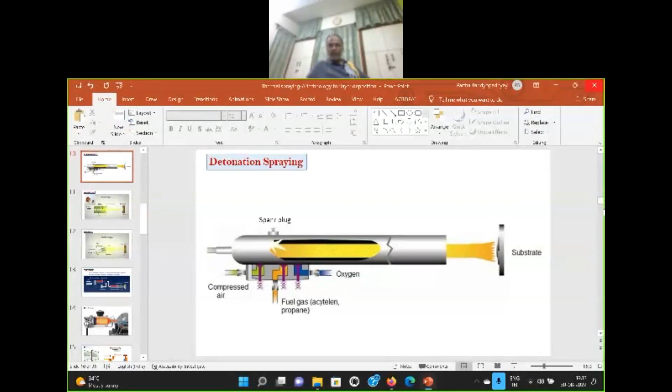Thermal spraying, a technology of adding layers. This is something we do. Now I will change the screen. Sometimes there is a time delay. Please let me know if you see my next screen.

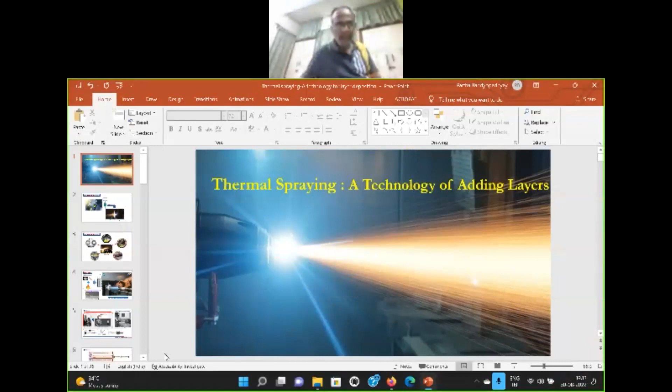Imagine a simple situation. You start with a 60 millimeter diameter shaft, and somebody asks you to reduce the diameter to 59. What will you do? Simply remove one millimeter, simple thing. Now suppose somebody asks you to increase the diameter. What will you do? Okay, therein thermal spraying comes in.

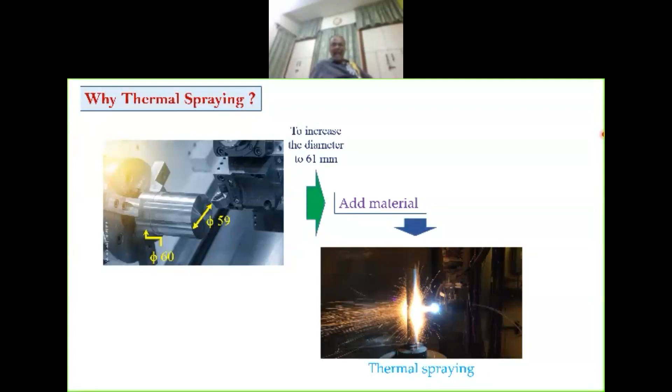It's an additive technology, though it does not belong to the club of so-called additive manufacturing, but it's definitely a technology of material and dimension addition.

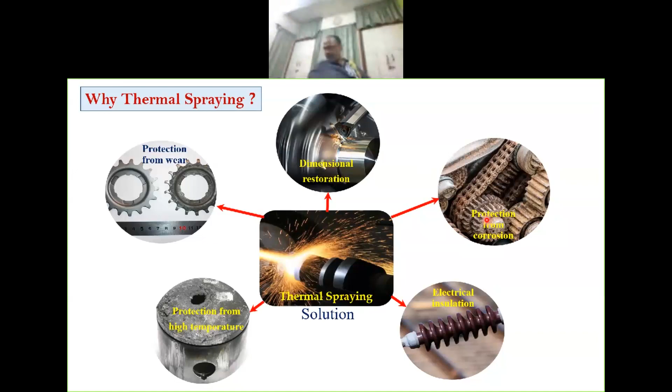Other than dimensional restoration, what can you do? We can add a wear protective layer. We can have a thermal barrier coating. We can have protection for electrical insulation. We can have protection for corrosion, and so on and so forth. I will talk about them.

What do we do in thermal spray? We start with a precursor material, either a powder or a rod, and we have a heat source. We marry them, where this precursor material is consigned to flames. They melt, and then somehow they are projected to a substrate or a target. If you melt a small particle and project it, what will happen? You will get a deformed particle. This is known as a splat.

This is known as a splat, the unit of thermal spray coatings. Then one layer will be occupied with splats, then the next layer, bead by bead, the coating will build up. To what extent? That depends. It's not a so-called thin film coating, I cannot go to half a micron.

Minimum thickness will be around 25 microns. How thick can we go? Up to several millimeters. The industrial standard is something to the tune of 300 microns.

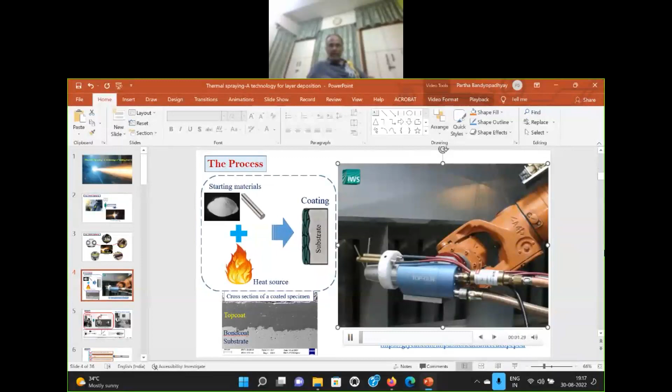Wait a minute, please. This video doesn't have sound.

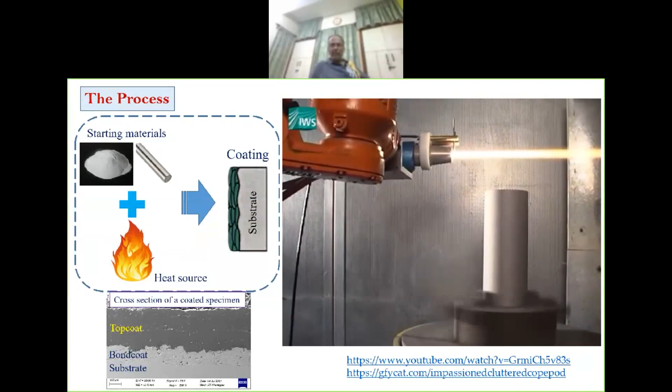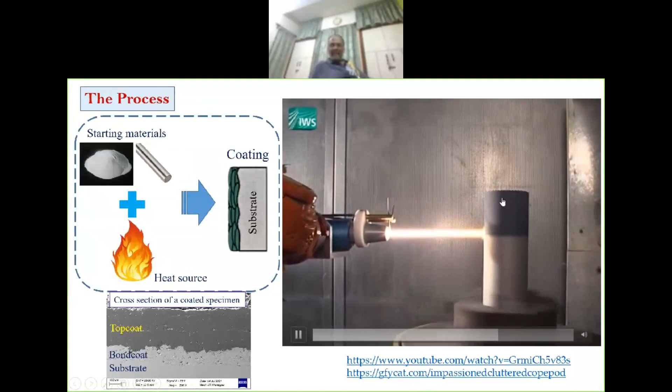This is the flame that comes out. It pushes the powder inside and you get a layer. This coloration is due to a different layer that is built up on the cylindrical substrate. This is how it is done.

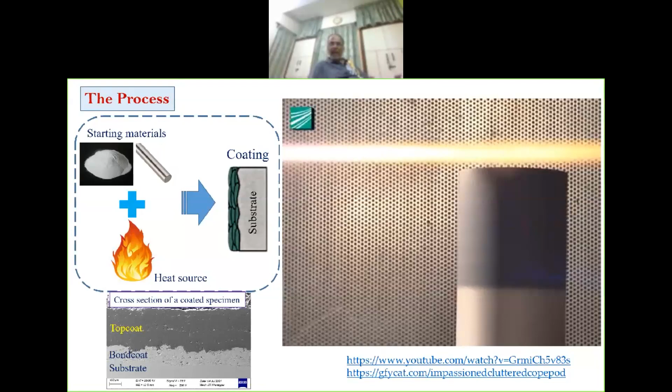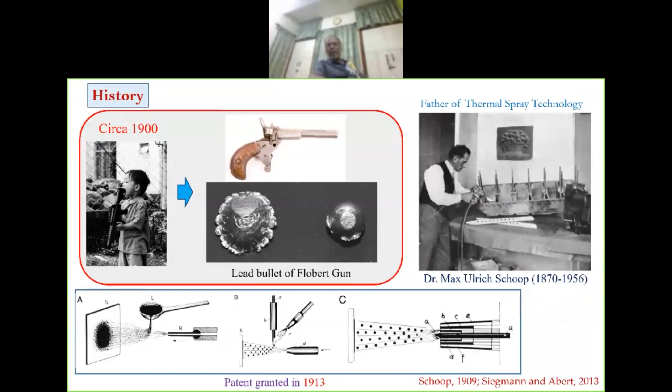He did his work in Zurich, in France, in Moscow, in Ukraine, many places, mostly in Europe. He was close to Tolstoy. And late in his life, he went to America to meet none other than the other great inventor, Thomas Alva Edison, but their collaboration, well, it's not well known.

One day, he found his son playing with a gun that pushes lead pellets. These lead pellets, when they impact on a metallic substrate, stick. This idea struck, and the idea of thermal spraying was born, which he took up and gradually developed in various forms.

Initially, he had a heat source, a flame. Onto it, he put powder. Next, he took up a rod, melted it with a heat source, and used compressed air to blow the molten particles to the target. There's another form where he used a gun, packing everything together.

A patent was granted in 1913 after a lot of fight. He had to invest a lot of time convincing the jury that thermal spraying, in fact, is a unique process. It is not a copy of a predecessor or another process, and it's well different from painting. Finally, a patent was granted.

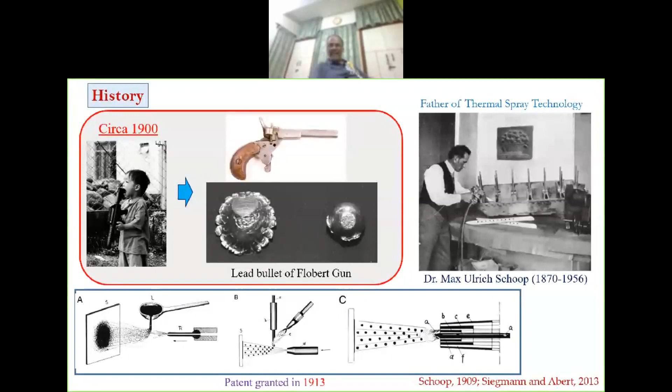Thereafter, it took off. We had the first stationary metal spraying plant. Then from powder we moved to solid wire. The process called metallizing was born, using oxyacetylene flame. In 1939, a job shop was opened. Now customers can come, get their old products refurbished with a coating, and go. Arc spraying came around the same time.

In 1950, people started talking about plasma spraying, detonation spraying, low pressure plasma spraying involving a vacuum chamber. And HVOF came in the year 1980. Thereafter, we have new kids in town like cold spraying and HVAF.

Now, what are all these? There are different variations of thermal spraying. It's a domain. Under this subject, we have got various processes. They're similar, but not exactly the same. Let us have a quick look.

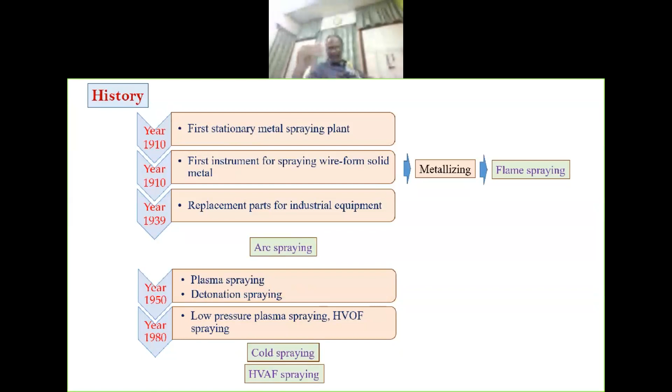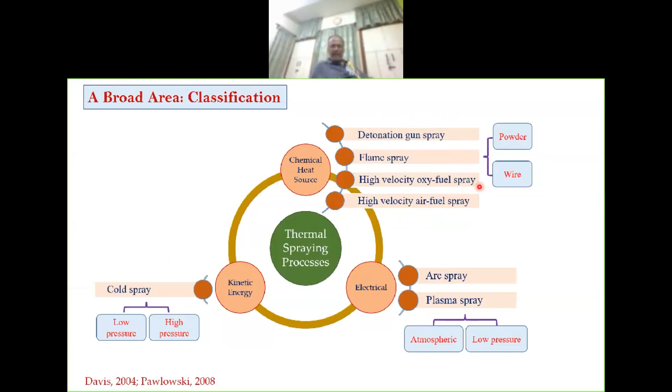When we have a chemical heat source, meaning either oil, mineral oil, or a gas like hydrogen or acetylene, we get these processes, either using powder or wire where consumables are used.

When you have got an electrical arc, we use these processes, arc and plasma spray. But suppose we do not want any heating at all, we do not want any melting. Is it possible? Like the lead pellet? Yes, that is also possible in a modern process known as cold spraying.

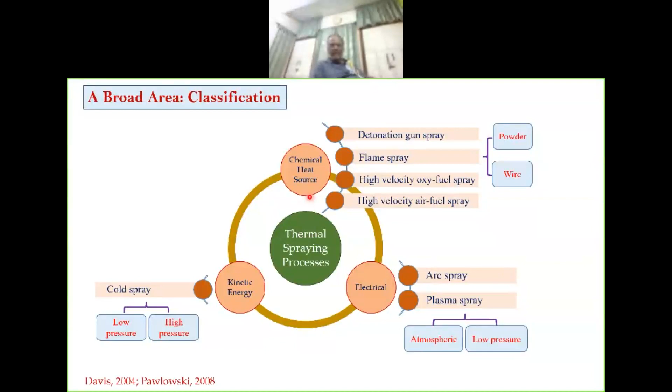Let us see what these processes are, very briefly. One second, please, it's creating some problem. Yeah.

We pass on the fuel gas, set the mixture ablaze, advance the wire tip that melts, advancing it bit by bit, and the compressed air catapults the molten particles to the target. Target is at a safe distance away. How much? Depending on the process and how much heat we inject, it can be 100 to 300 millimeters. One can use accessory cooling for the substrate as well, so it generally remains cold and does not undergo any distortion. So these processes are also known as cold process.

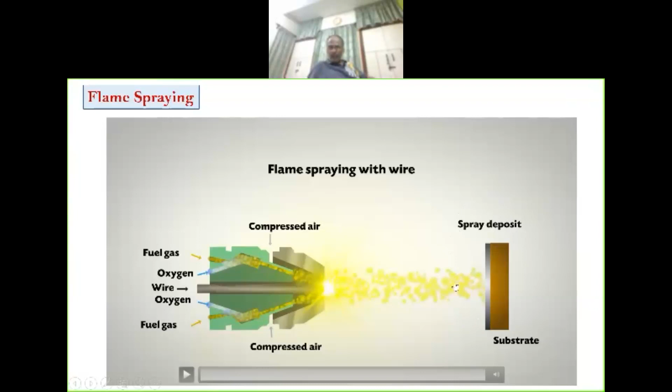It's good for metals. It's good for carbides, where we have a thin layer of metal covering the carbide particles. It's possible that way, it's well known, it's a commercial success story.

One question, Bidut. Yes sir, am I clearly audible? Yes you are. Okay, I need to be assured of it. Should there be any problem, don't hesitate to stop me. Yes, sure.

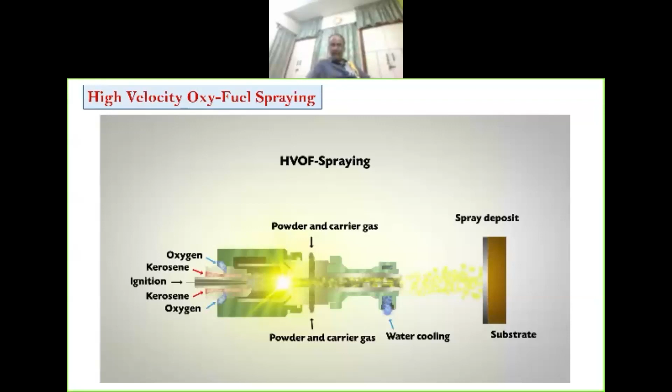Next, another one, we call it detonation spray. What is that? We have a tube. Inside the tube we have installed a spark plug. We push in fuel gas and oxygen and start exploding it at a rate of 2 to 4 hertz. It explodes, high temperature and pressure generates, powder particles inside are carried and taken afloat by the expanding gas and carried to the substrate. Once again, a very dense coating, but it's a metal coating, not meant for oxide. Also, the process is noisy and a little bit hazardous, and it's not available commercially. One must go to a designated job shop to get it done, but it's a very good process for metals.

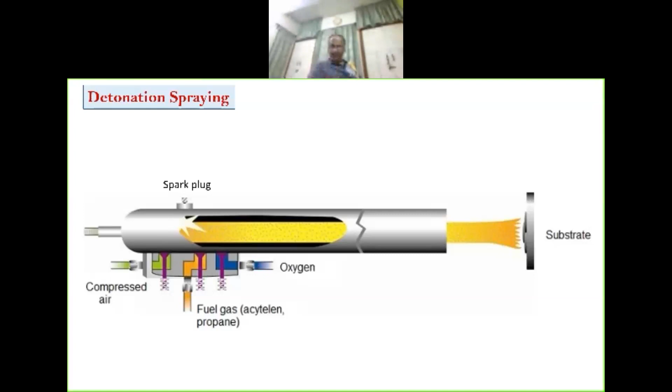Next, my favorite, this is what we do. What we do is something like this. Once again, an encasement is there. It's an electric process, so we have an arc. We have a hollow anode. A hollow anode, this anode is hollow. Into that we put in a bullet-shaped cathode. We put it inside. There's an annular gap through which we pass in some gas. We have to chill the entire gun, so there's an arrangement for cooling water, very important. We have an arrangement for putting powder and carrier gas.

What we do? We start an arc. Gas in contact with the arc will ionize. When it is ionized, it conducts more electricity, so current increases. More ions and electrons, more current, more heat, more gas, more current, more heat. In a small volume of gas, I keep injecting a large amount of energy. Commercially available plasma is available at 50 to 100 kilowatts, it can be more. One constraint is heating: if the temperature is too high, the entire encasement, electrode and nozzle will melt away. So the procedure is good for making a sun if you can contain it.

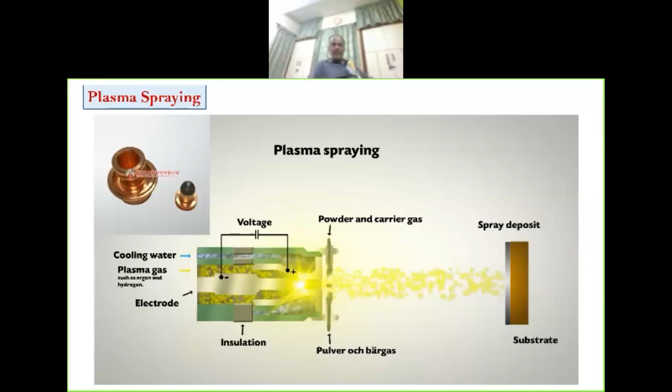Here it's an electrically powered source. We can tune the power, so depending on the power, we can melt polymer, ceramic, or metal. Substrate, as said, is cold, so it can be metal, ceramic, or polymer. So we have metal, polymer, ceramic on metal, polymer, ceramic. Virtually anything on anything, that is the beauty of the process. Speed is reasonably high, and we can get very high temperatures.

Its younger cousin is this, simple to understand: arc spray, developed long back. I have a positive wire, I have a negative wire. Bring them close together, get an arc. The tip will melt away, compressed air jet will do the rest. Meanwhile, keep using rollers, keep advancing the wire. Very good for electrically conductive wires. For everything electrically conductive that is available in a wire, you can develop coating very quickly.

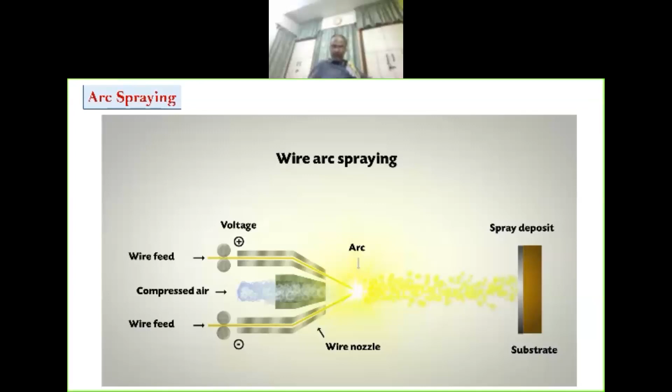One of the new kids in town. What do we do here? We feed helium, argon, or nitrogen gas at a very high pressure. How much? 50 bars, 60 bars, 40 bars, normally not below 40 bars. Put it, heat it to a gentle temperature. For example, if you are spraying aluminium, melting point is 660, don't heat it beyond 300.

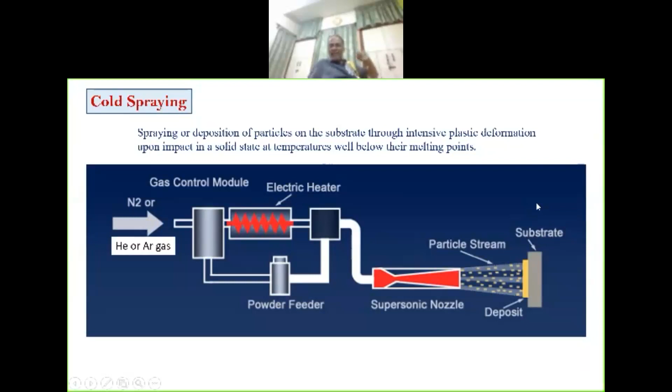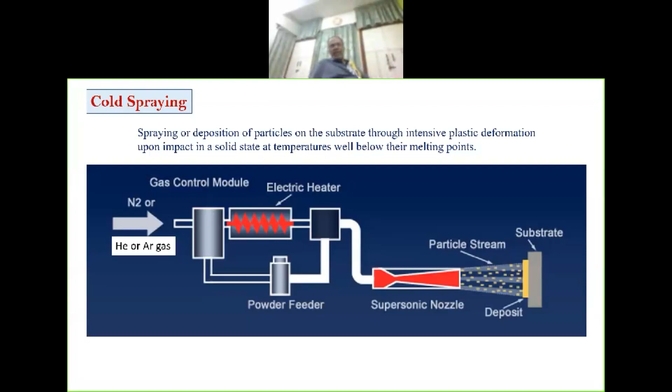You have a powder feeder, pass it to a converging-diverging nozzle at very high speed so that the particle deforms and sticks to it. No melting, no oxidation, no phase transformation, layer is compressive. Of course, it's not meant for brittle materials. I have a video, it's similar.

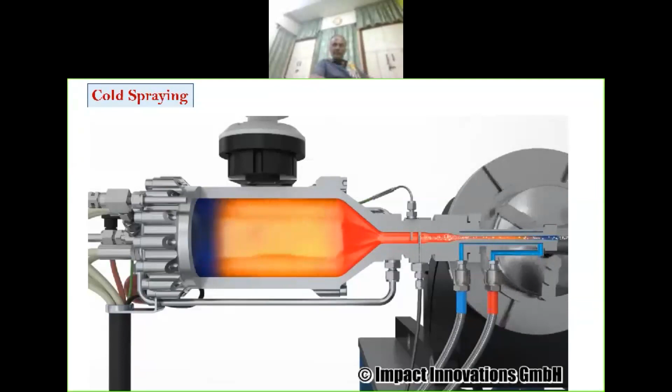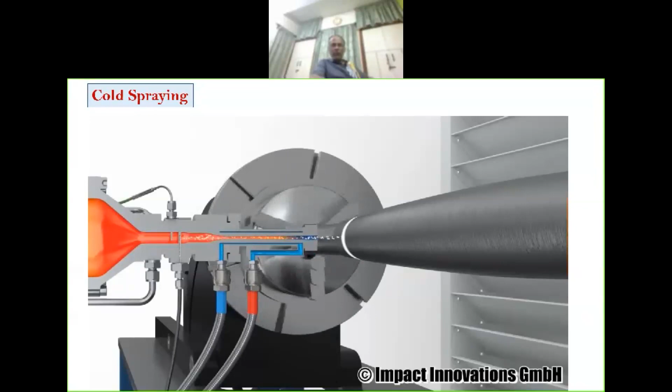Very good. They're deforming and sticking. Of course it's artist imagination, but it is something similar.

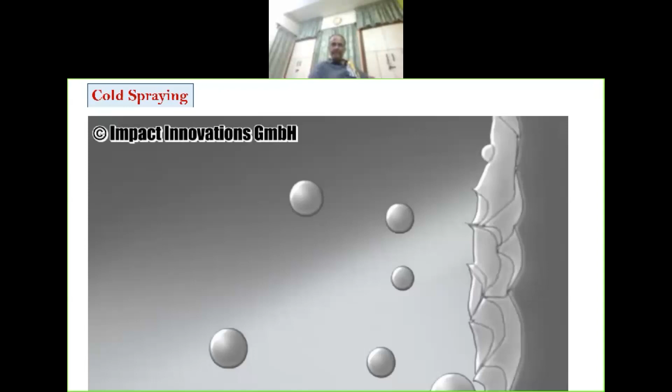I have said many things. Gas at very high pressure, distance 100 to 300, temperature, cooling. These are so-called parameters of spraying.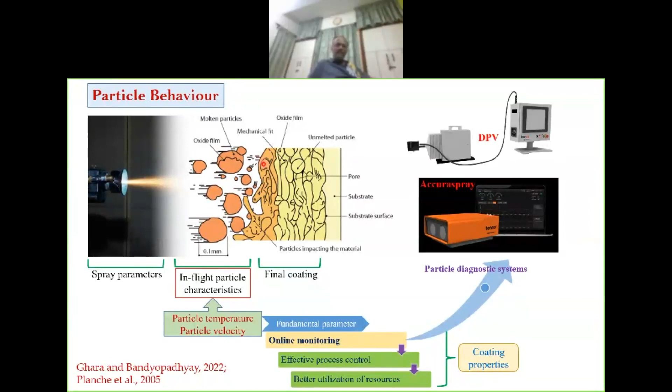Whatever the parameters may be, it is the state of powder before impact that determines successful coating. What is meant by state of powders? There are only 2 derived quantities derived out of 30 parameters. It's temperature and velocity.

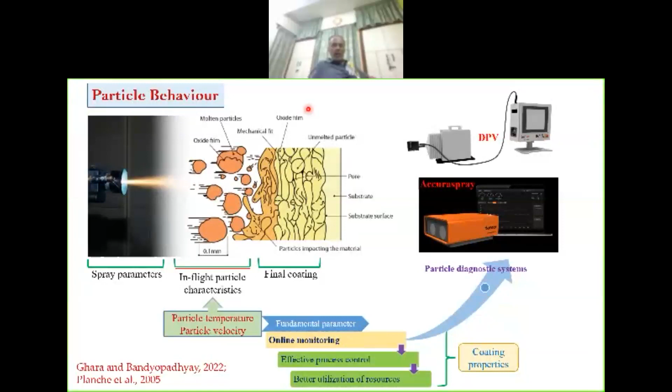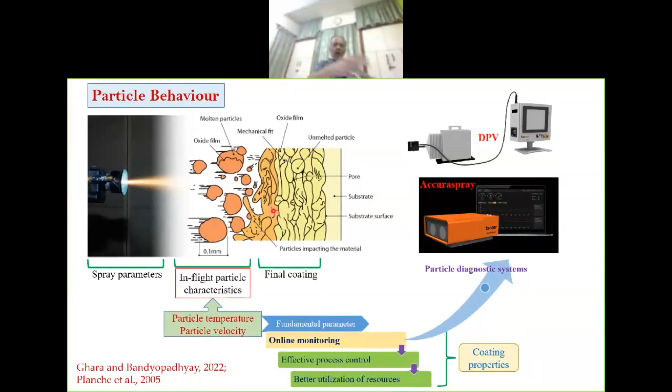Temperature too low, we'll get an unmelted particle, or we get pores, or we get particle bounce back. If you have very high velocity, splats will badly deform. So these two are important.

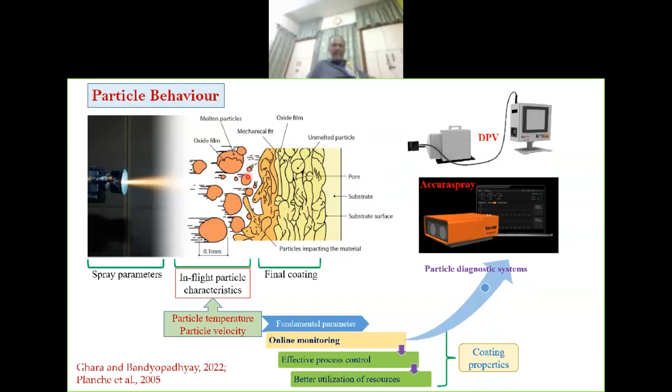So once we can measure the particle velocity and temperature before impact, we really do not care what parameters brought this, it has given us these two derived quantities. So is it possible to tune the parameters and reproducibly produce temperature and velocity in a close range? That's the question.

There lies the solution to our problems. It is possible. It took nearly 100, more than 100 years to achieve this target in a laboratory scale somewhere in India. Still, it has been done in laboratory. We do not know when it will find the light of day in an industrial setup.

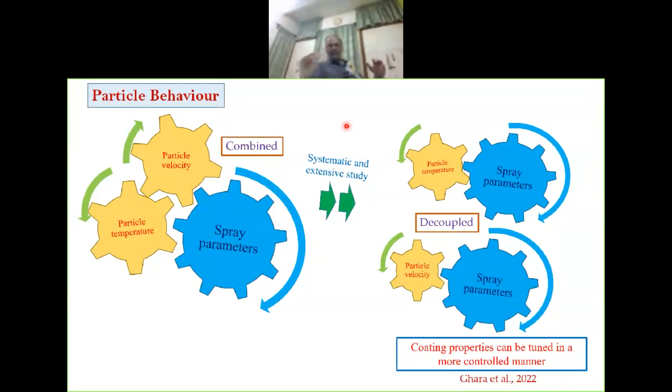What is the problem? The problem is that it is difficult to separate particle temperature from velocity. Why? Imagine you want higher particle temperature or higher particle velocity. What will you do? You'll simply increase the arc power.

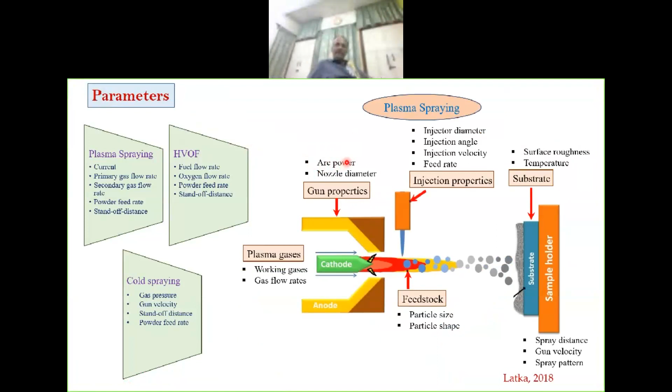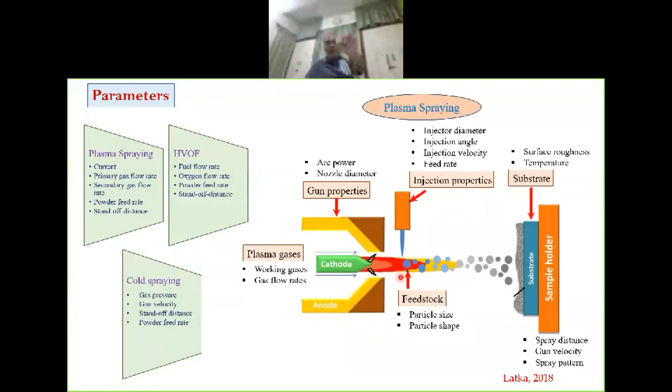Temperature will increase, of course, but at the same time, at high temperature, gas will expand faster and carry the particles faster. Velocity will also increase simultaneously. That is something you never wanted to start with. They are coupled.

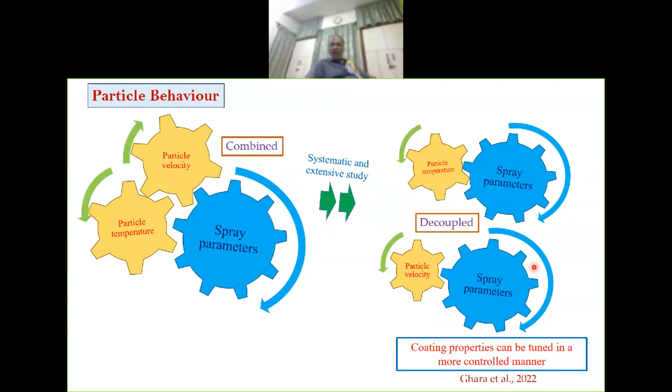Is it possible to decouple them? As said, in the laboratory scale, yes. And well, it was done in 2022 for the first time to our knowledge. What we achieved here is like this.

Have a look at the velocity and temperature. If you increase temperature, you'll melt it. Too low a temperature will leave particle unmelted.

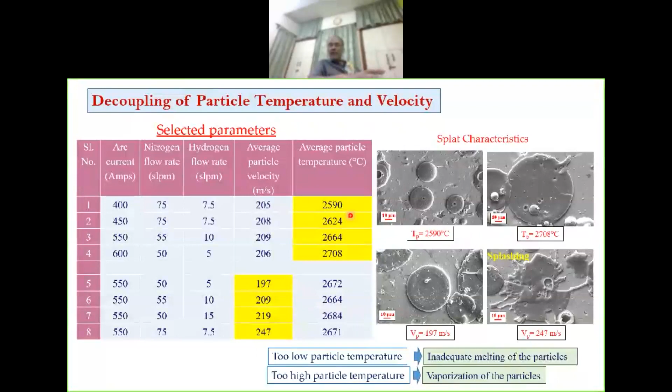But if you go too high, well, you are wasting heat, number one. And number two, for low melting point particles, some particles can vaporize. We can give particle temperature up to 3000. We don't need a temperature of 3000 for melting iron or nickel, forget about copper or aluminium. So deposition efficiency will fall if you insist on too high a temperature.

Velocity, alumina particle 197 meter per second. See the shape of the splat? And you carry it to 247, see the splat, it is deformed. A high velocity will exacerbate the properties of the coating as it has been found.

What happens when you spray with an increase in particle temperature? In the range of this experimentation, it was found that while the velocity is in a narrow constant range, with improvement in particle temperature we got improvement in properties like fracture toughness, elastic modulus, and hardness.

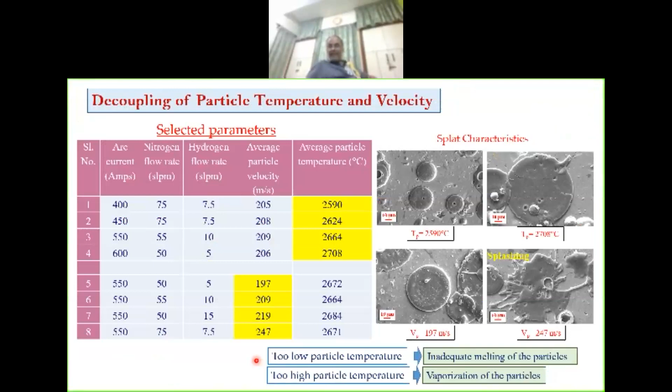Similarly, with increase in velocity, initially porosity decreased because of good particle shape. But when you increase velocity too much, as shown previously, we get a distortion in the splat shape and we get an increase in porosity. Hardness also initially increases, but with porosity it decreases. Same thing goes for modulus of elasticity.

So temperature and velocity must be decoupled so that we can get rid of the load of baggage of parameters, and they should be closely monitored. This process requires very stringent process control.

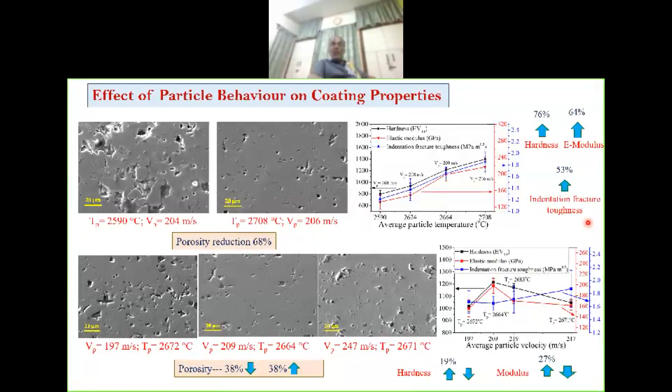We talk about velocity and temperature measurement. Yes, there are commercial setups available, though they're a bit expensive maybe. We use a couple of Canadian setups, and there are European products available off the shelf on the market.

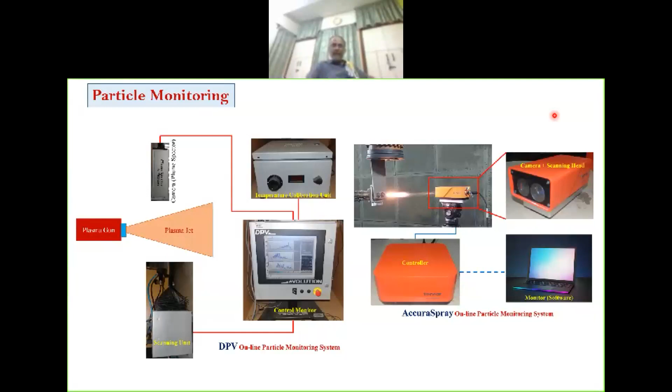For measuring temperature, what we do is sense the temperature of the particle. We detect the particle, sense its temperature for two wavelengths, and measure their intensities. Once we get the intensities and the wavelengths, from a correlation we can get the surface temperature of a particle.

For velocity measurement, we have to track a particle for a small distance, plot the time and known distance, and we can get the average velocity before impact over a short distance, which is close to the real instantaneous velocity.

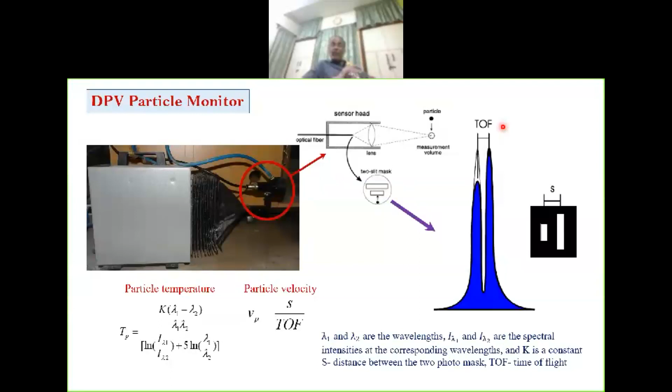Kindly note, dealing with these instruments is also always not easy, but it's possible.

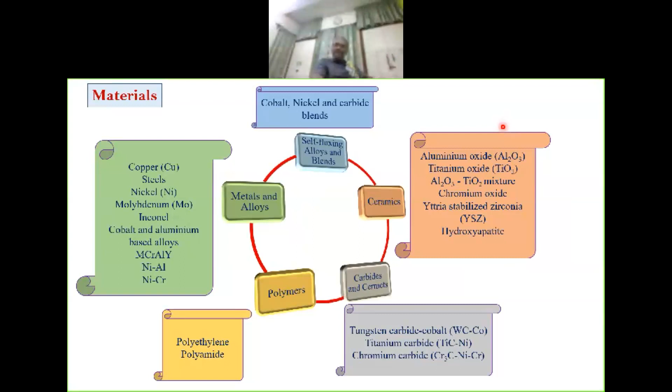What do we spray? These materials include almost all metals with specialized alloys, polymers, a host of carbides, and a host of ceramics. As said earlier, polymer, ceramic, metal combinations. If you give me a powder with an interesting property that does not decompose at high temperature, one can get a functional coating with interesting properties.

So that way, with time, as the exploration develops, more and more newer applications are expected to come. Another advantage is that compared to thin film coatings, which usually require closed chambers and closed environments, here it's possible to do it in atmosphere, and one can literally spray quickly on square meters of substrates. So that's the advantage one gets.

The thickness can also be pretty high. As I said, 300 microns is pretty standard.

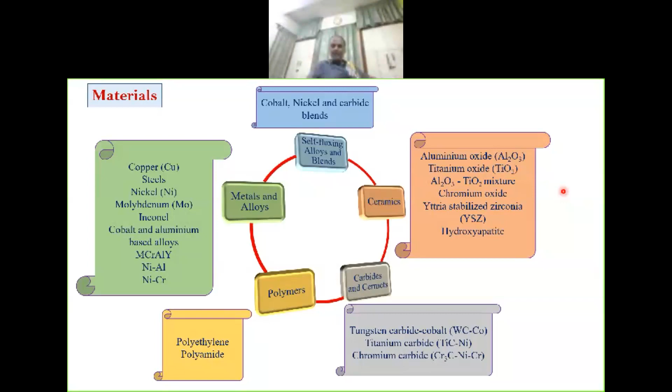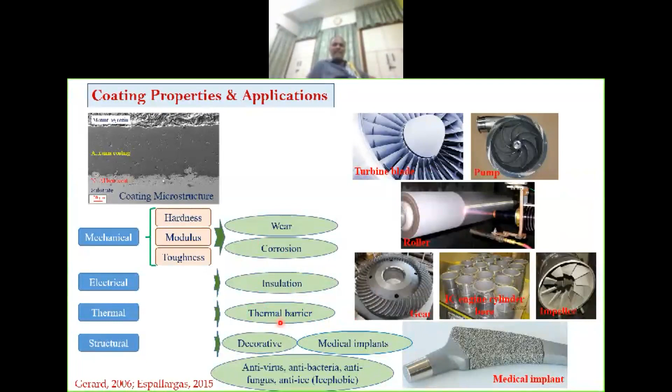Applications: many applications are possible. It's for wear, for corrosion, for electrical insulation, as thermal barriers in turbine blades, decorative purposes, medical implants, and also biological coating is possible.

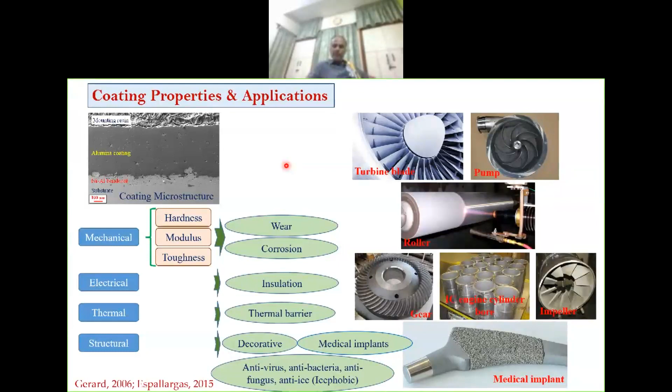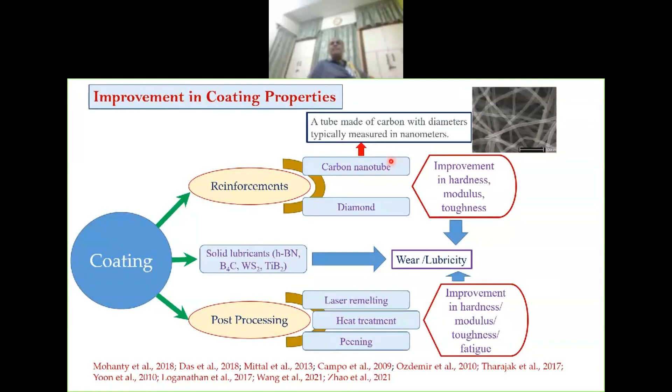Can I further improve it? There are mechanisms. You can produce something that gives it hardness, stability, and strength. For example, you can put in carbon nanotube, you can put in diamond, and you have good wear property. Add to it some solid lubricants that will give you lubricity as well. You can take a sprayed coating and post-process it using laser remelting, heat treatment, or shot peening. They are possible.

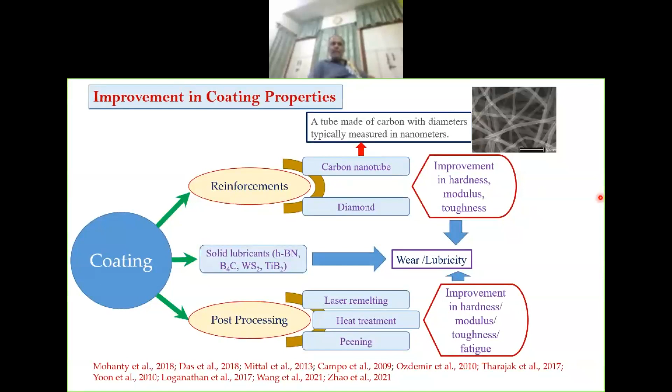Now there are some issues here that I'll briefly address. First, if you want to have a lubricating coating, add tungsten sulfide. If you want to improve the hardness, with bronze, we use diamond; bronze and diamond mix well. If you want improvement in wear properties of alumina, mix in CNT.

Now there is a problem: how do you mix them? In a jar mill, by mechanically shaking, you can mix them. But difficulties are there. For example, in use, they can gravity separate. Or if you take some materials like carbon nanotube during mixing, it can break. So how will you mix them?

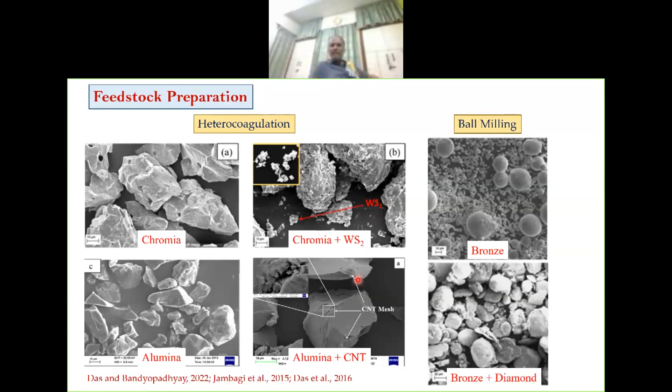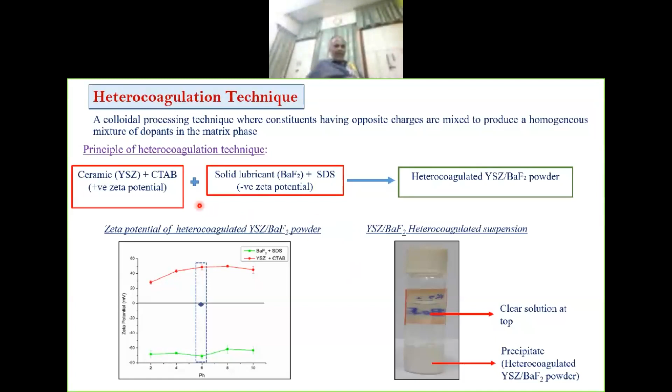An example of a process we call heterocoagulation: we take yttria stabilized zirconia hard coating, and onto that we wish to put in barium fluoride, a high temperature solid lubricant. If you try to mix them, they tend to segregate. What will you do? You bring in another chemical here, called CTAB, a surfactant available in detergents. And you bring in here SDS, another surfactant.

This surfactant surrounds the YSZ particle and gives it a positive charge; we technically call it positive zeta potential. On the other hand, SDS provides it a negative charge. What's the advantage? Well, in a charge-free environment, if you put particles in water, they tend to agglomerate and quickly decant, quickly hit the bottom. But if you add charge to them, they will repel each other, not agglomerate, and they tend to remain in solution for a longer time.

Typical use of surfactants: now you mix and keep this positive mixture ready, and this other mixture ready. Add them up slowly. What will happen? Positives will get in touch with negatives and lose charge, coming to zero. When they lose charge, they can agglomerate and hit the bottom of the container. No shaking, no breaking—you get a perfectly homogeneous, stable mixture that you then have to dry out.

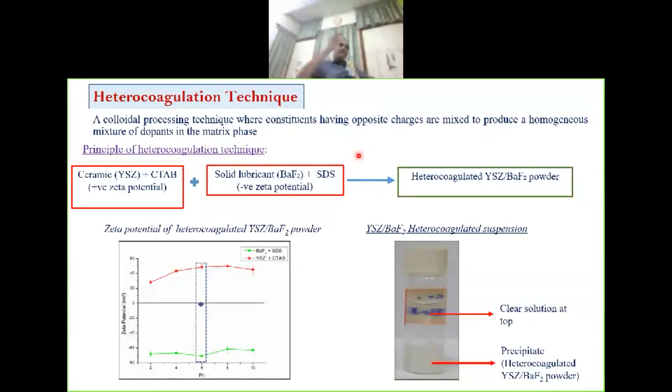Instead of BaF2, I have taken CaF2 this time, similar thing. I took alumina and titania, the standard material, and put a coating.

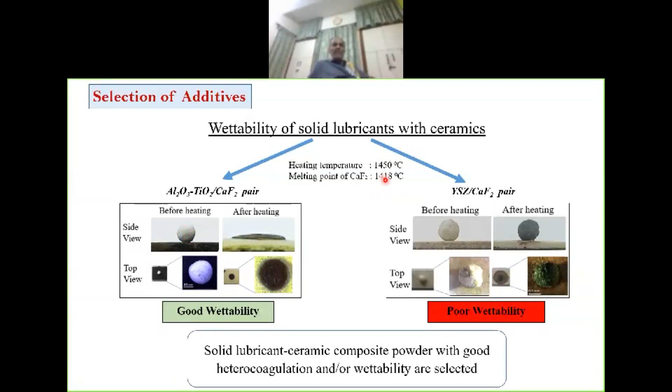Onto that, we put a globule of calcium fluoride made from calcium fluoride powder. The melting point of calcium fluoride is 1418. I heat it up to 1450. See what happens? It is completely dispersed. We say the wettability of calcium fluoride is good with alumina titania.

Try a similar exercise with YSZ. What was round before heating just blackened. It didn't spread over. So picking up an additive is also another exercise one must be very, very careful about.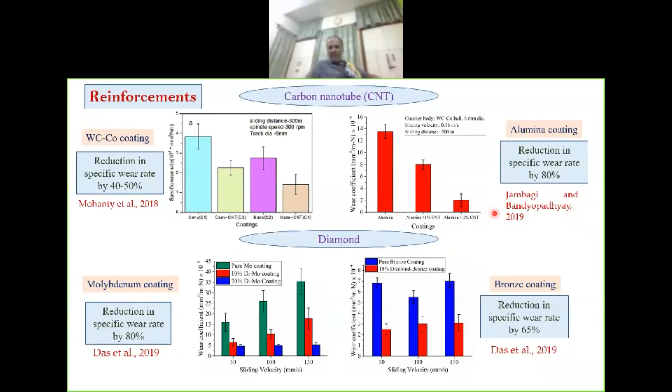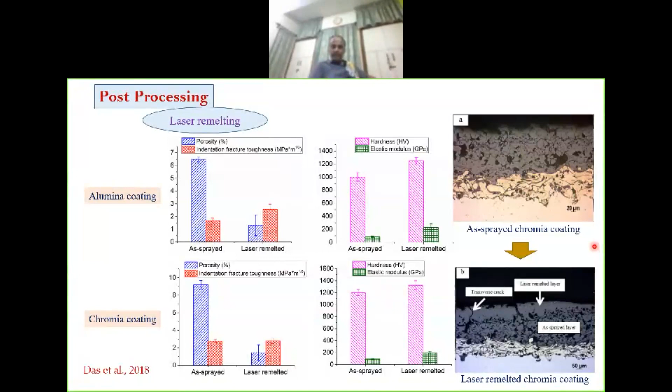Another perennial question - we have a coating and a substrate. The substrate doesn't melt, coating melts. As long as it doesn't decompose, we can spray it, so anything on anything. We do not talk about metallurgical compatibility at all. So how do coatings adhere on the substrate?

Can you measure it? Yes. How do you measure it? We take a substrate and coat, glue both ends with two anvils and pull them apart. If the coating breaks, the glue is usually stronger.

Now very strong glues are available in the market. If the ceramic coating goes up to 25 to 40 MPa, it's okay. For metallic, we got to 60 to 100 MPa. It's okay - as long as it works, it serves the purpose. We do not get into it. Why?

One explanation is that the interface between the coating and substrate is too thin. It's difficult to investigate. We carried out a small investigation somewhere. This is an example.

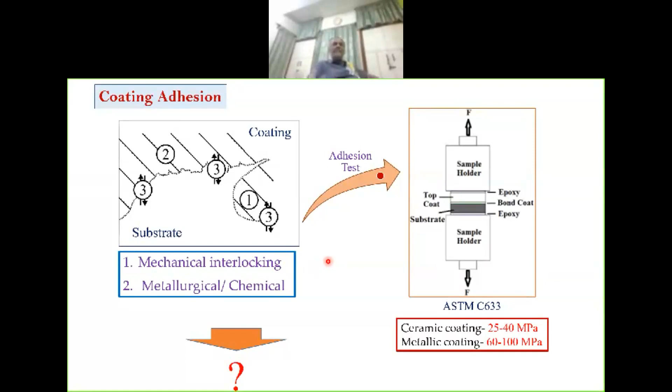Before that, there are several possibilities of the bonding. It can be mechanical interlocking at the rough surface - we make the substrate rough initially by grit blasting, or the bond coat, if you spray on the grit blasted surface, it has a rough surface. Or it can be metallurgical chemical bonding. We don't know. In this investigation, this is published - one can find it.

We measure the residual stress profile of the coating. Starting from the top coat, we get into the bond coat and slowly get into the substrate. We get near zero stress at the top coat, and gradually going inside we get a strong negative compressive stress. When we come to the bond coat, we get low compressive followed by low tensile stress. In the substrate, we have low compressive to low tensile. This is a bit intriguing.

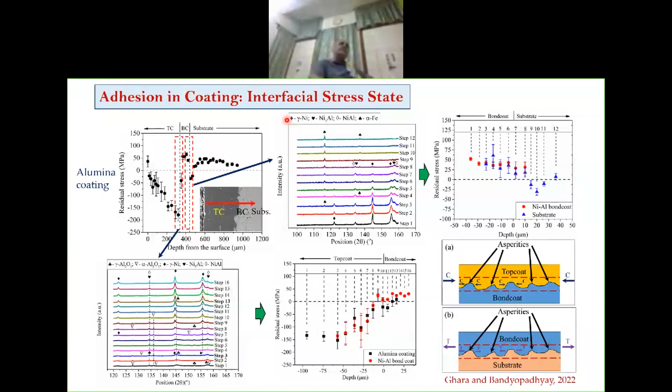How can there be a stress discontinuity in the continuous material? This should not be stable - one surface should come off. There must be a continuity.

Then what is done? Initially, layers were removed at 20-30 microns from the top coat. Then as the interface of bond coat and substrate is approached, layer removal of 5 to 7 microns was done. So what is there at the surface, top coat?

Aluminium oxide. So near the surface, inside the alumina, we are supposed to get alumina peaks in the X-ray diffraction. That's what we got. Then gradually, 5 to 7 microns we go in, slowly, and after some time we start getting nickel peaks from the nickel aluminide bond coat, and thereafter, after a certain time, we do not see aluminium oxide peaks naturally - we get only nickel peaks where we are well inside the bond coat. Okay, from top coat to bond coat.

While we expose the layer, we measure the stress. What we see this time is that initially, somewhere here, it has a high negative stress.

Negative stress remained negative, and gradually it raised its head and became continuous with that of the bond coat. This is a macroscopic view, but it won't tell us the whole story. We miss many data points. One has to do very minute depth profiling to see stress continuity across the top coat, bond coat, and bond coat-substrate interface.

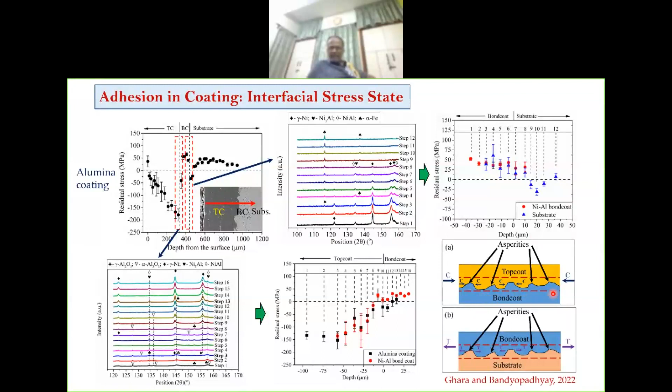What is happening is like this. This is the bond coat rough surface, and we pour in the top coat. This is a rough surface, and the asperities do not have any stress - they are stress free. But when you pour in the top coat, like in casting, depending on thermal expansion and heating, it will have either a tensile stress or a compressive stress. If it is tensile, it will push on these outer flanges. If it's compressive, it will try to shrink and put pressure on the other side of the thread-like asperity features.

So in other words, this is the stress of the top coat that pulls the stress-free asperities towards its own same stress level. Ultimately, when we go deep into the bond coat, its stress behavior dominates, and we get a mild tensile stress, as reported in the macroscopic view.

So in this investigation, it appears that bonding is predominantly mechanical. But it remains to be seen whether some chemical or metallurgical bonding has taken place. Going into the thin bond coat, there's no diffusion zone to speak of - just a few microns. It's difficult to determine the metallurgical nature of bonding. This will be an interesting investigation for the future.

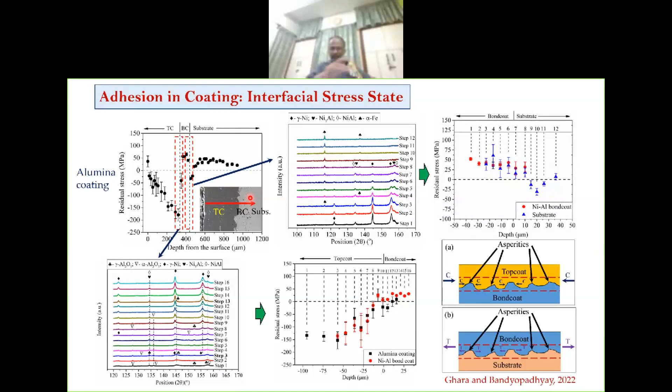So here, in conclusion, what we see is that thermal spraying is a process where we can simplify parameter selection with adequate instrumentation. There are different processes we can cater to, a large number of applications, and the scope for property improvement is always there. It's a growing field, expected to grow over the next few decades.

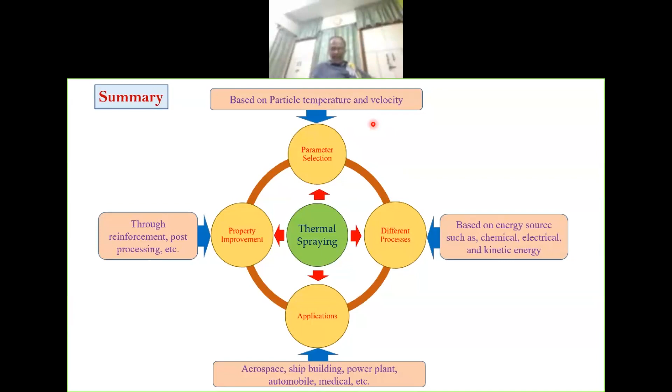Vidut, I can't hear you. Yes sir, Professor, go please. Is the session chair muted or not? He can unmute himself. Professor, please unmute yourself. Is there any difficulty with the session chair? I can hear you clearly and I can also see you. I have no difficulty, so let me check with the sessions. Well, if the session chair is not available, or maybe there are some connection issues, I think we can open it for discussion in the house. So I would request the speaker to accept queries. I will. Yes, so it's open to the house. And Middu, please check if the session chair is available or not.